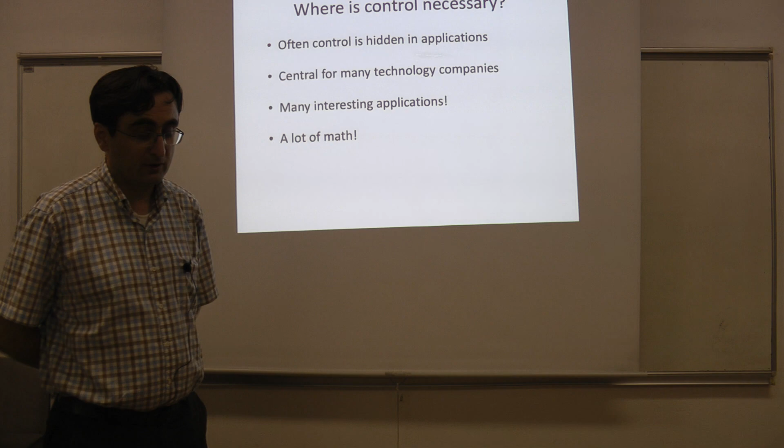Many technology companies try to apply control. We have many interesting applications, and one of the basic properties of control theory is that it's a very mathematical theory. You have to like mathematics in order to like control. It is more mathematics than physics, actually. In some electrical engineering courses, like electromagnetics, we have more physics than probably mathematics, in my opinion.

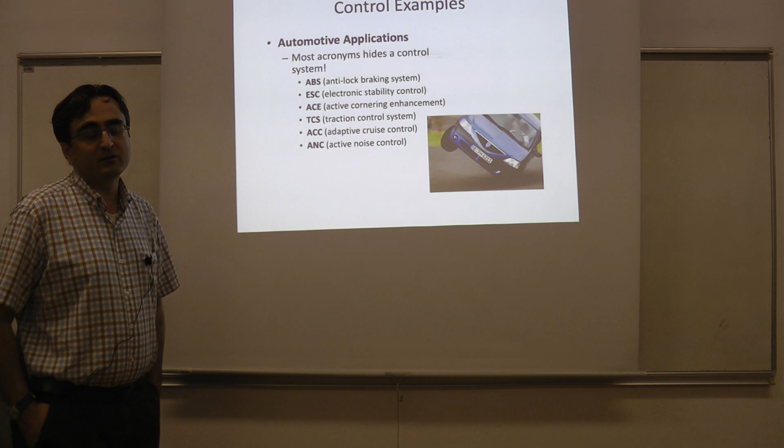But in this course, we are going to have much more mathematics than physics. So let us look at some control examples. In modern cars, you see lots of these abbreviations, and actually each one of them is a control example. ABS, anti-lock braking system, or electronic stability control - they are inherently control applications, and they are working while you drive your car.

The second example that I can give is industrial robots. These are doing the same motion over and over in a factory, taking something, and then taking it somewhere else to do some job. They have to do the same thing over and over, and for them to be successful, you need to control the electric motors placed in the joints of these industrial robots.

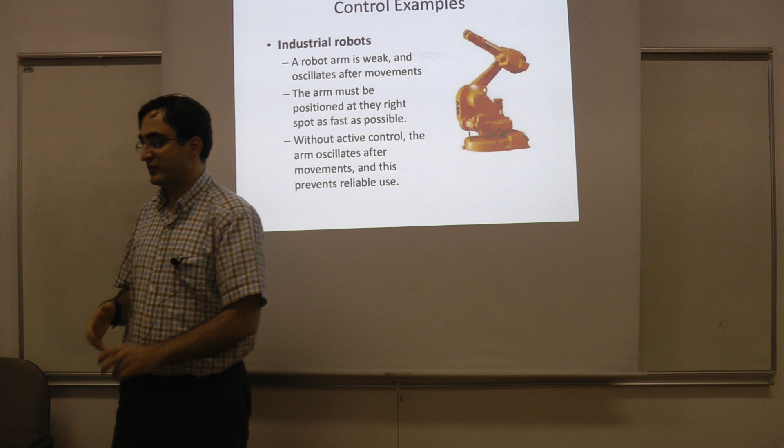One problem is that these robots are usually flexible. People want them lighter and lighter, so they don't want heavy robots, and when they become lighter, they become more and more flexible. That places a restriction on the properties of such robots - you have to control them in a very good way to avoid the oscillations caused by this additional flexibility. So this is also a classical control example.

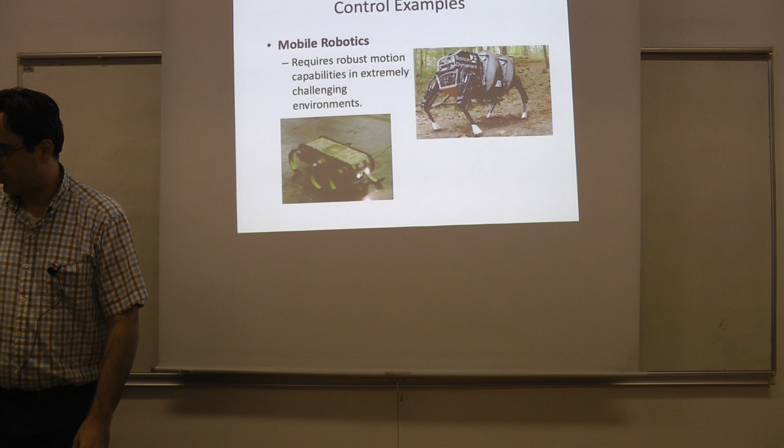The third one is mobile robotics. They're entering our lives more and more. You might have seen this Boston Dynamics robot - it's like, I don't know, maybe a donkey. We also have a robot in our department designed for very rough conditions, called a 6-leg robot. Of course, you have to control every electric motor put on these joints, and additionally put some more control into these robots for them to work safely.

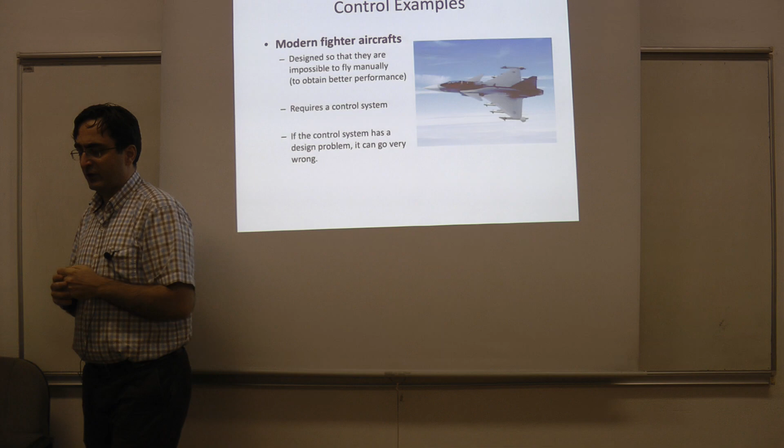Fighter aircrafts are another example. When you get in a commercial airplane, those airplanes are designed in a stable way. That means when the engines are shut off, the airplane would only glide - you won't immediately fall to the ground. So they have a stable structure. But fighter airplanes have to make lots of maneuvers quite fast, so their structures are usually designed in an unstable way. Without using control theory, it is impossible to fly these vehicles. If the control is not sufficient, these type of airplanes would fail.

I will give some examples from health. Diabetes - şeker hastalığı in Turkish - is when people's bodies cannot control the glucose levels in their blood. The organ that controls glucose level in the blood is called the pancreas, and if the pancreas goes out of order, you have the diabetes disease. What we can do is put a mechanical device into the body, such that glucose levels would be measured from the blood, and then we can inject insulin into the body intravenously. So this is a health application that uses a controller - by measuring the glucose level in the blood, it tries to control the glucose level in the blood.

We're going to see the connections between these applications.

Another example might be economical. At least I know you take multiple courses from the economy department. Here, one economical system we can talk of is the system between interest rates and inflation. As you increase the interest rate, the inflation would be decreased, and we have a relationship vice versa.

In control, we try to change or select the inputs of the system such that the output behaves in a desired way. How do we quantify that desired behavior? We usually model it with another signal called R of t, the reference signal. What we want from control is for Y of t, the output, to follow this reference signal R of t. The reference signal is the ideal thing we would like the output to do.

How does it do that? It does it, or we do it, by choosing the input in a satisfactory way. That is what control means. Here there are disturbances, and these are actually working against our control objective. Disturbances, as the name implies, are the inputs that we cannot control in the system, and most of the time they work against our control objectives.

So then what is control? Control is choosing the input U such that the output is close to the reference, against the disturbances. This is the abstract definition of control. The thing we would like to control is the system: input, output, and disturbances. The aim is to design the control input, to choose this so that the system's output behaves as wanted, becoming close to the reference signal despite the disturbances.

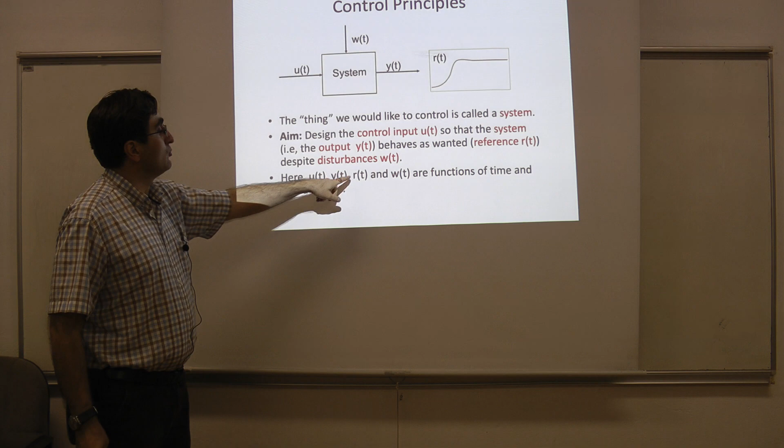We are going to see examples of this, as I've given already, and in those examples we will try to understand which signal corresponds to which variable here. So U of t, Y of t, R of t, and W of t are all functions of time, and they are called signals. We call a function of time a signal in this course.

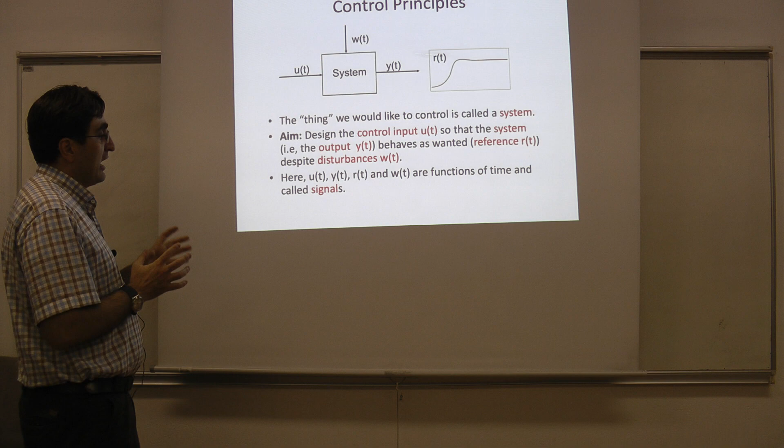Now let us look at some examples of such signals. I have four examples, and I will go over them one by one. The first example is the control of the speed of a car, car speed control, usually called in technical terms cruise control.

You might have heard of it if you look at some car advertisements. Cruise control is the control of the car's speed. We want the speed of the car to behave in a way that we like, and we are going to use the inputs in order to achieve that aim.

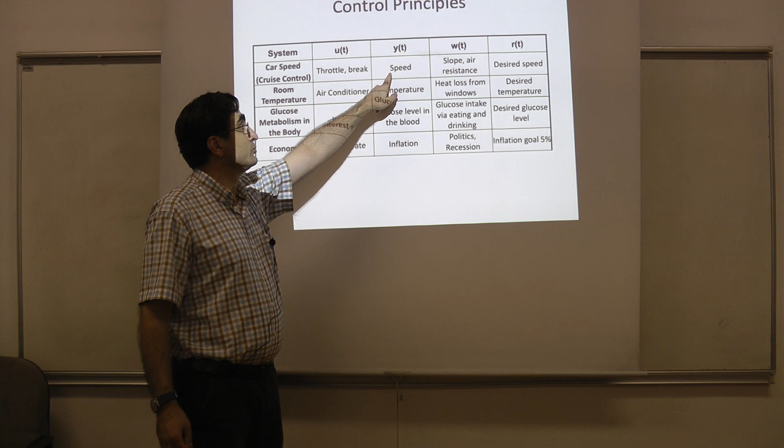Here our system is the car body, and the output of that system, the thing we would like to control, is the speed of the car. That is the output signal, Y of t. How do we control the speed of the car? There are automatic systems that achieve that, done by adjusting the throttle and the brakes.

Throttle is gaza basmak, the thing that increases the speed of the car. Brakes are fren, which decrease the speed of the car. In recent cars, there's always a circuit that tries to adjust the speed of the car if the user gives an order to do so.

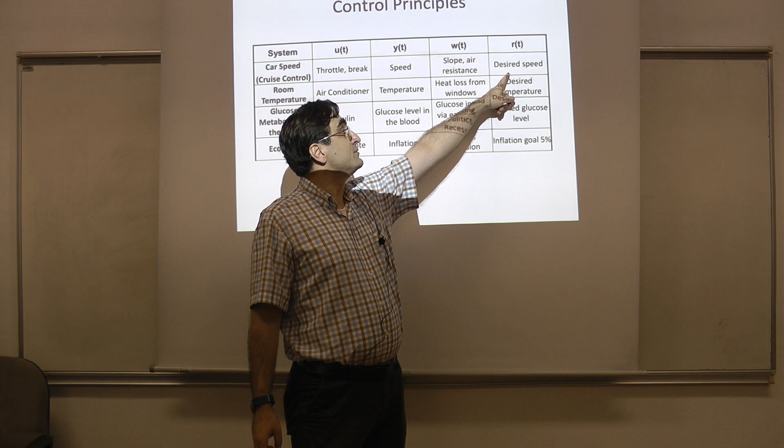For example, you can adjust a knob in your car so that the speed remains constant at 90 kilometers per hour. That is the cruise control objective: we want the speed of the car to equal the desired speed, 90 kilometers per hour. Our reference signal is therefore a constant at 90 kilometers per hour, and we want the speed of the car to be equal to that constant. To achieve this aim, we use the inputs throttle and brake.

So what can be some disturbance signals in that case? The car might be going on a slope so that it slows down if I don't do anything - that is one disturbance, the slope of the road the car is traveling on. Or the air resistance - as the car goes faster and faster, it encounters more air resistance. That is called drag, and it is also a disturbance working against our control objectives.

So this is our first example. The second example is the room temperature. Suppose that I'm trying to control the temperature of this room. Suppose it is at 23 degrees, a little bit cold, and I would like to bring it to a constant level, 27 degrees.

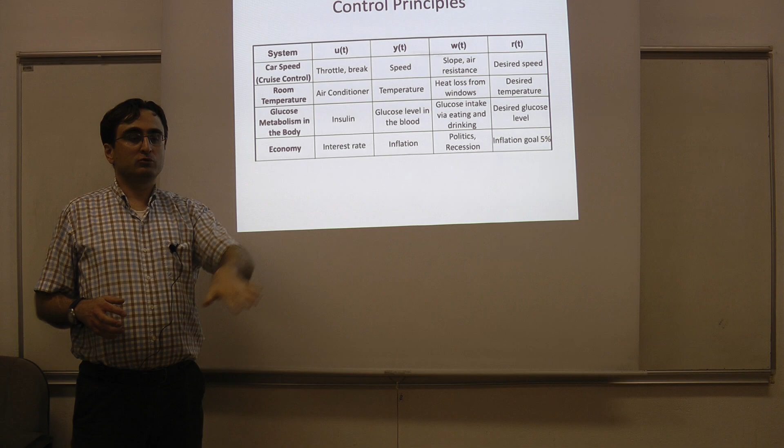In that case, what can be these variables? Our system is this room, or the air in this room, and the input we use to achieve this is the air conditioner - it can cool or heat the room to achieve our control aim. The output of the system is the temperature of the room, which we are trying to control. The reference is the desired temperature, again a constant. I do not want the temperature of the room to behave in an oscillatory way; I want it to be constant for comfort.

And what can be some disturbances? In this case, there is heat loss from the windows. If it is winter, it is going to be more difficult to heat this room. So the outside temperature, or heat loss from the windows, is a disturbance in our control system here.

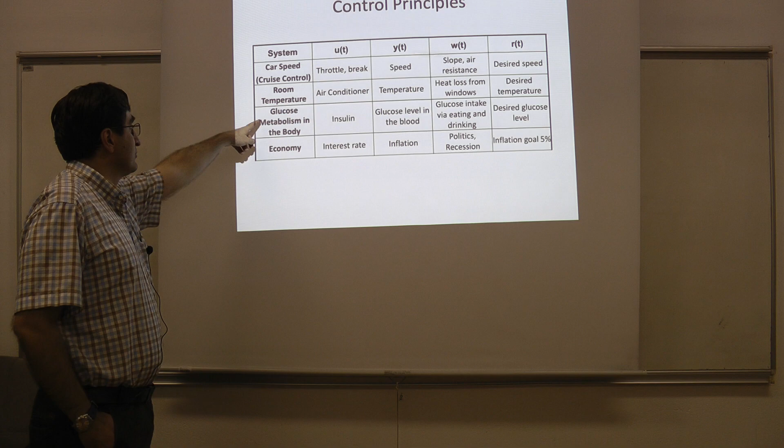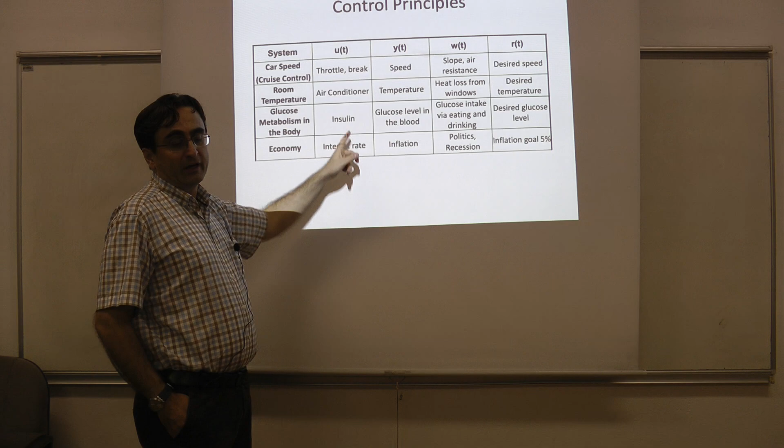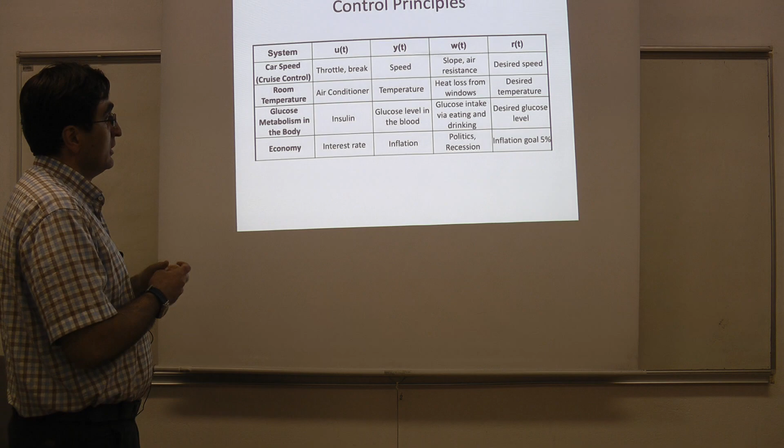I have already given these last two examples. It is the glucose metabolism in the body - the diabetes example. Here we are trying to control the glucose level in the blood; this is the output. Insulin is the hormone we give from outside because the pancreas is not working - insulin is our control input. We have a desired glucose level in a patient depending on their weight, so we have a constant reference signal: we want the glucose level equal to a constant.

What can be some disturbances here? During the day we are trying to keep the glucose level at a constant value, but the patient is going to eat and drink things that contain glucose, which increases the glucose level in the blood. That is against our control objectives - we are trying to control the glucose level despite the glucose intake of the patient.

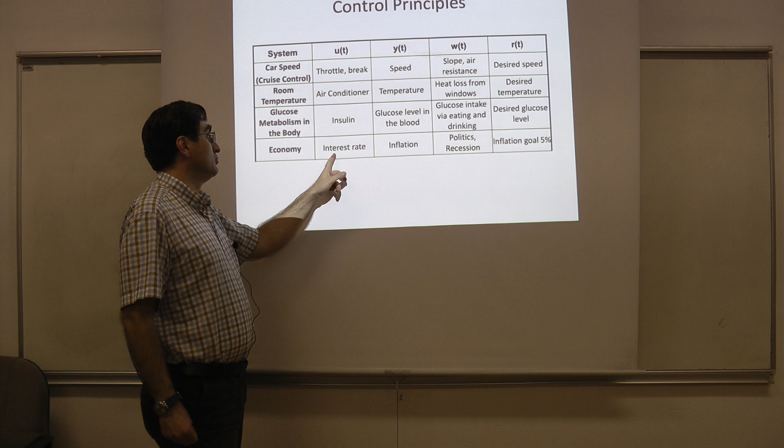The last example is the economy example. Here we are trying to control inflation in the country. Usually we have an inflation goal, which is 5% inflation per year, and the central bank uses the interest rate to control the inflation.

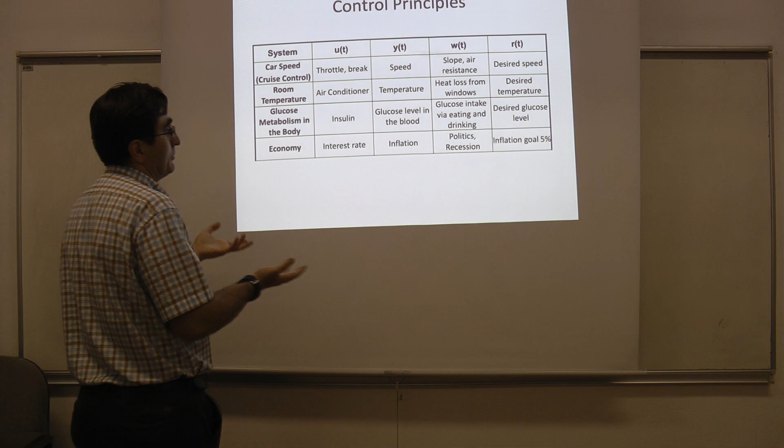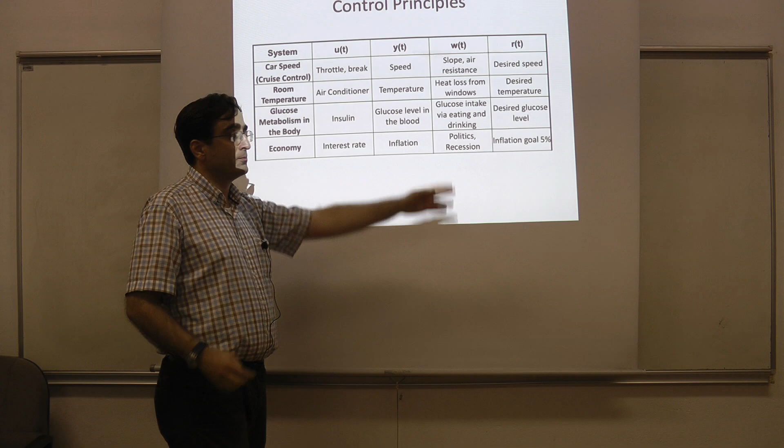What can be some disturbances in this case? The economy is a very complex system with lots of disturbances, but some obvious ones can be politics or elections in the country - these give a disturbance to the inflation. Or there might be a recession, which is a problem for the central bank and makes controlling inflation more difficult.

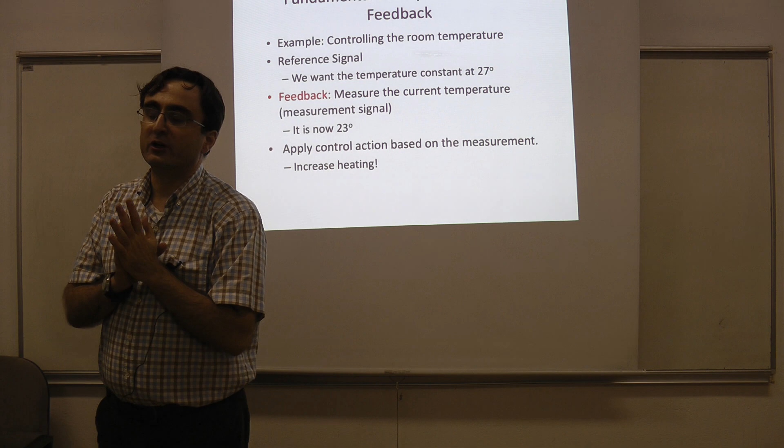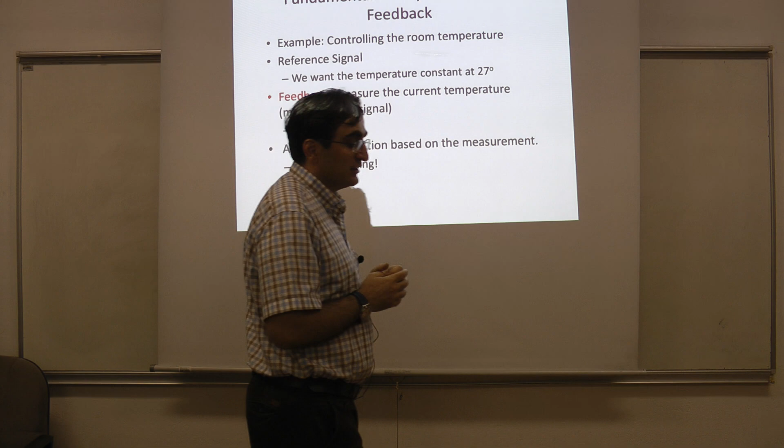So now let us go into the feedback idea. Let us go back to the control example, controlling the temperature of this room here. The room has a temperature. Suppose that I don't know that temperature, and suppose I want to bring the room to a constant temperature, 27 degrees. In order to achieve the control here, you have to measure the current temperature of the room. Without measuring the current temperature, you won't know whether to heat the room or cool the room.

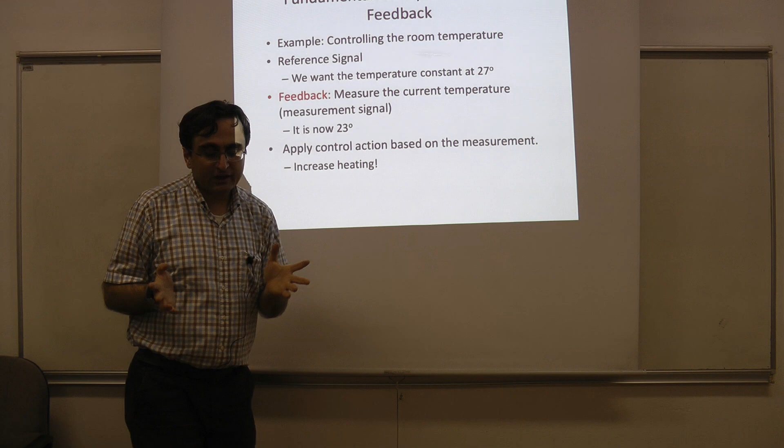So this measuring idea, measuring the current variable values in order to design the input, is called feedback. When you measure the current temperature, you know the desired temperature, and then you can compare those, and decide whether to heat or cool the room. That is the idea of feedback. Without feedback, you really cannot achieve good control most of the time. So measuring the current temperature is called the feedback.

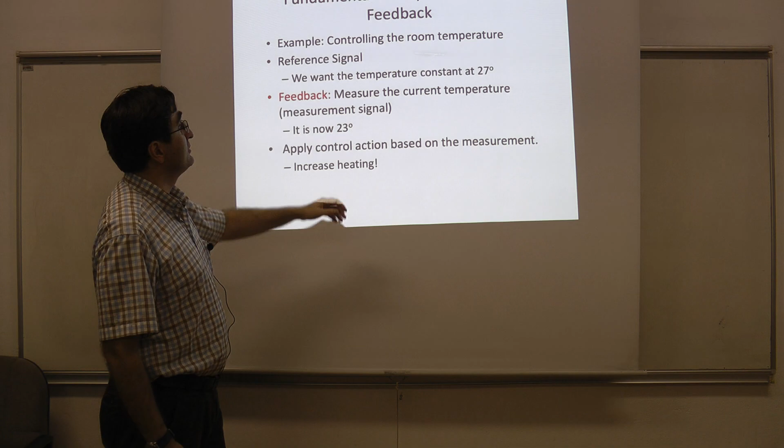Suppose that it is 23 degrees, then you know that you need to heat the room to reach the desired temperature here, which is 27 degrees.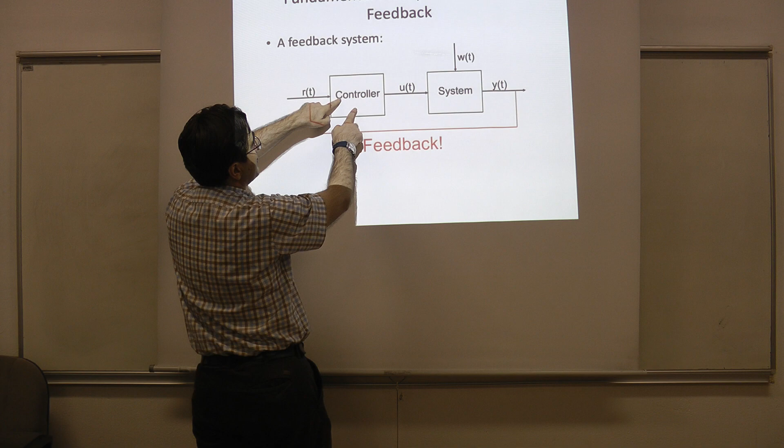What we do here is take the reference signal and the current output of the system, and put them into another system, and this system has the job of giving the input to the actual system. This additional system is called a controller.

Usually the controller is a human being. If I'm in control of an air conditioner in this room, then I know whether to heat or cool the room. In that case, I am the controller.

But if you would like to achieve this job automatically, then I have to put here an artificial system which is called just a controller, and this controller has to look at the reference signal and the current output value, and decide what input it should give to the actual system, whether to heat or cool the room automatically.

And this part of the system is called the feedback loop. This part is called the forward part, this part is called the feedback part, and overall I have a feedback loop. Without the feedback loop, this system is called an open loop system, the loop is not closed. With the feedback loop, we call this system a closed loop system, and we would like to investigate what the properties of such a system would be.

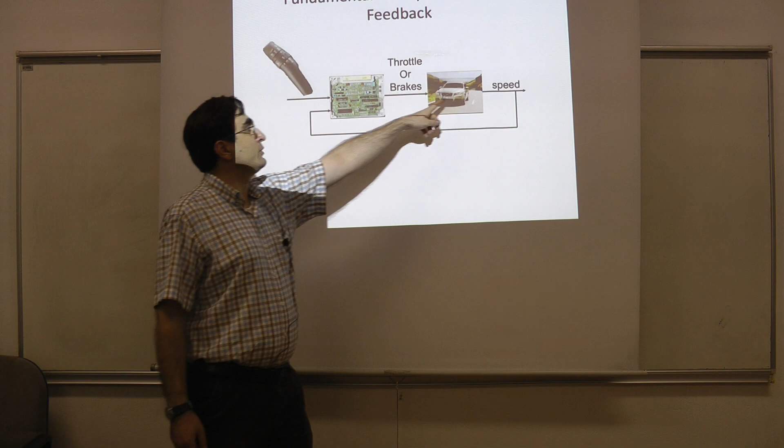He or she gives the reference speed here. If your car has a cruise control, you have a knob somewhere in the car that you can adjust the desired speed. This is the reference signal. There is a circuit in the car that can automatically apply throttle or brakes in order to achieve a desired speed. That circuit has to know both the desired speed, the reference signal, and the actual speed of the car, in order to decide whether to apply throttle or brakes. So that circuit is called the controller in this application.

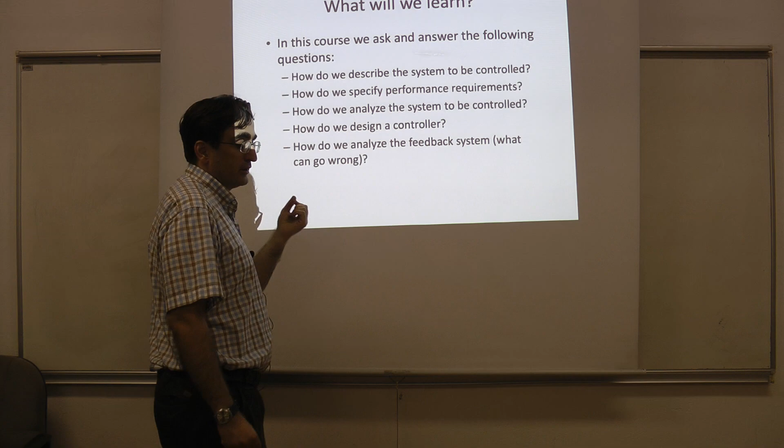The second thing we are going to do is define some performance measures for the control systems to satisfy. What can those performance measures be?

Let's go back to the cruise control example. Suppose currently the car I drive is going at 70 kilometers per hour, and I want the cruise control system to bring the speed of the car up to 90 kilometers per hour, because I want to go faster. Would you really be happy if the automatic cruise control system brought the speed of the car to the desired speed, 90 kilometers per hour, in 2 hours? You probably wouldn't like that. You want this to be fast, so you want the speed of the car to reach the desired speed in a few seconds, or half a minute or so.

Now suppose the same situation, but would you want the speed of the car to come to the desired speed, 90 kilometers per hour, in 0.1 milliseconds? If you think about the speed-acceleration relationship, if the velocity changes from 70 to 90 in a very, very short time, the driver and passengers are going to encounter strong acceleration forces. If you do this in such a fast manner, it's not going to be good either. So you really do not want the cruise controller to be too fast, because then the accelerations the passengers encounter will not be comfortable. And you don't want it to be too slow either.

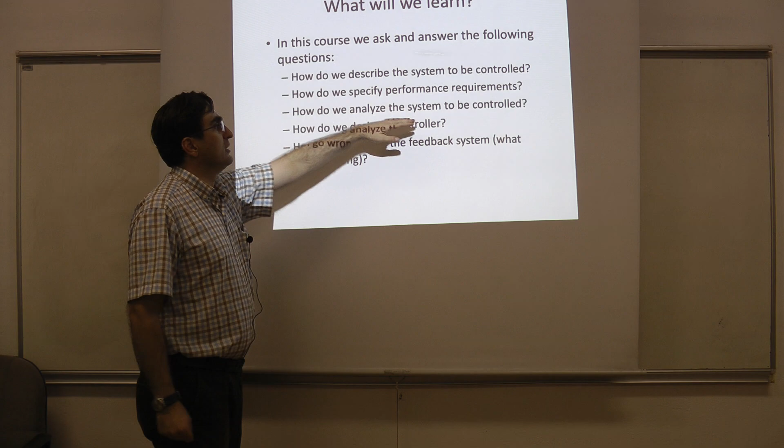And then we're going to see how do we analyze the system to be controlled. So we're going to see what is the open loop system, it is the car itself, and what is the closed loop system. What happens when I close the feedback loop? And then we're going to see how we design a controller.

So what type of system should I put instead of that controller block? We will see that there are some standard types, and we're going to see how to design those in order to satisfy the performance requirements. And finally, we are going to see how do we analyze the feedback system, the closed loop system, and what can go wrong. Sometimes a system with feedback can be much, much worse than the same system without feedback.

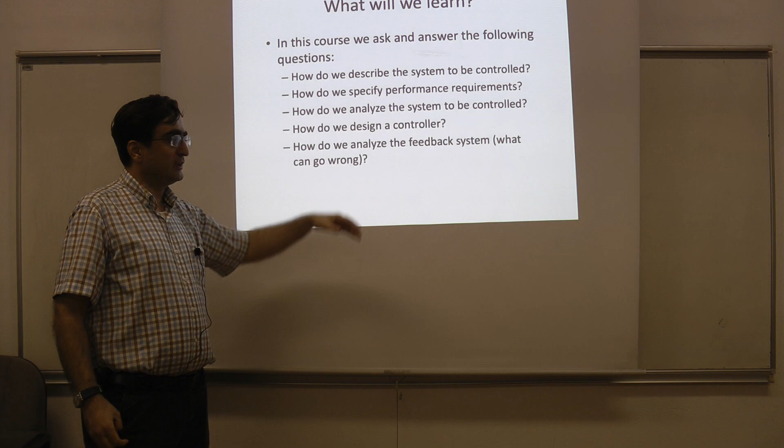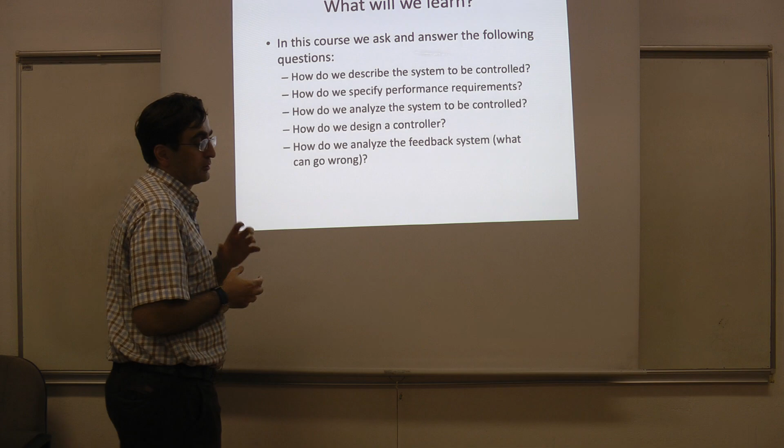We call this thing related to the performance of the feedback system the stability of the feedback system. So sometimes if you design your feedback system in a really bad way, then your system is going to be much, much worse than what you started with. We're going to see what the problem is, and this problem is going to be, again, something called positive feedback, and it is going to be related to the concept of stability.

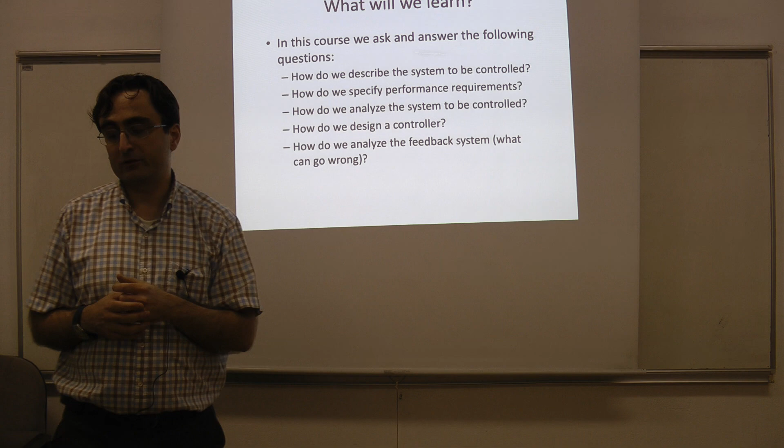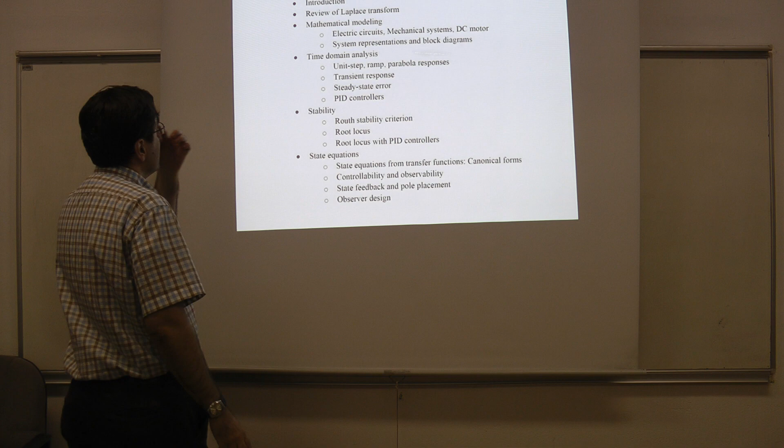So now let us look at the tentative course outline here. So we are here at the introduction. In this course, we are going to use some mathematical models, and these mathematical models are going to start with differential equations. Differential equations will be only the start.

We are going to see that handling differential equations by themselves is really difficult. So we're going to instead go into something called the Laplace domain. You have probably seen the Laplace transform in your differential equations course, but here, at the beginning of this course, I would first like to review this Laplace transform that we are going to use to transform differential equations into new types of models in the Laplace domain.

And then we are going to see the concept of mathematical modeling. In terms of systems, the mathematical modeling that we're going to apply is on electric circuits, mechanical systems, and something called the DC motor. Since you are not really electrical engineers, you have to think about these only in terms of mathematical models. You really do not have to understand every detail here, but you need to be patient.

Once we present the mathematical models here, they are not really going to be something difficult that you cannot apply yourself. So if you are patient in this part of the course, then I'm sure all of you are going to be able to write the mathematical models for such systems quite easily, and it's going to be useful in the other parts of the course.

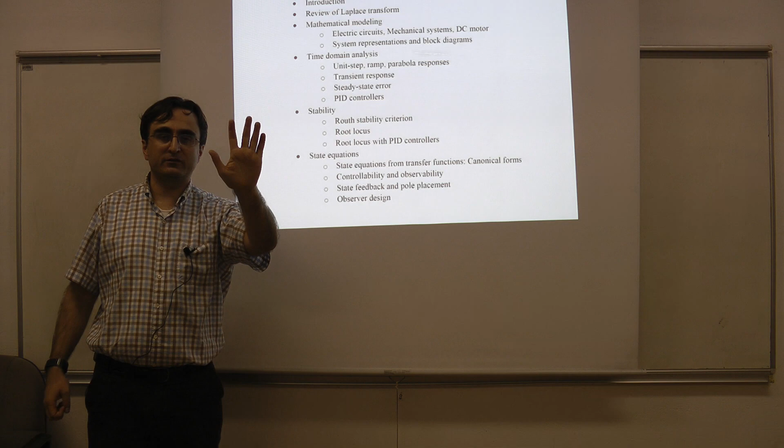So in total, we're going to see 3 different system representations. These are 3 different mathematical models that we can obtain for a single system. Of course, they are in some way related to each other, and we're going to see the relationship between those. Usually we're going to be working with block diagrams: connected systems, where the output of one system is connected to the input of another. We will also have some feedback loops in the block diagrams that we are going to use.

So this second part of the course is called time domain analysis. This is nothing but specifying the performance requirements of a control system. So in this part, we are going to learn how to specify the performance requirements from a control system.

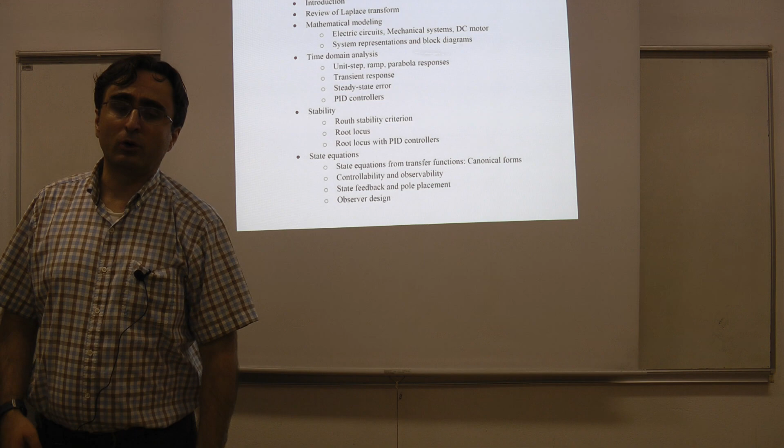And the third part is related to this important concept of stability. As I told you, sometimes feedback makes a system worse, and we are going to learn when it does that. So here, that is the concept of stability.

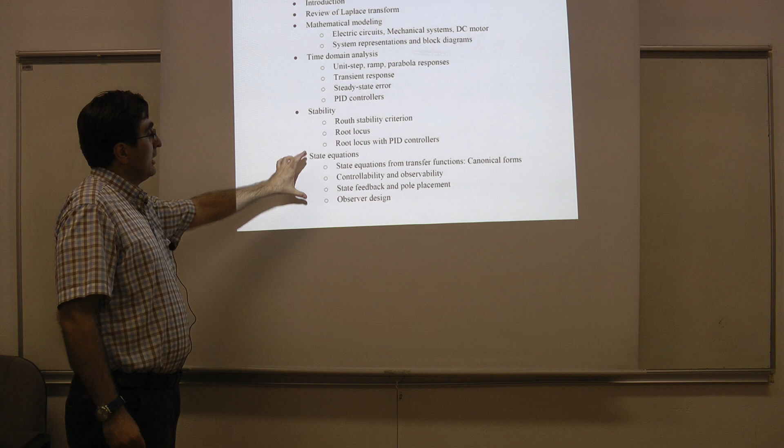And this last part of the course is the state equations. We're going to see one of these modeling types called state space representations, and we're going to apply the earlier ideas to the state equations or state space representations.

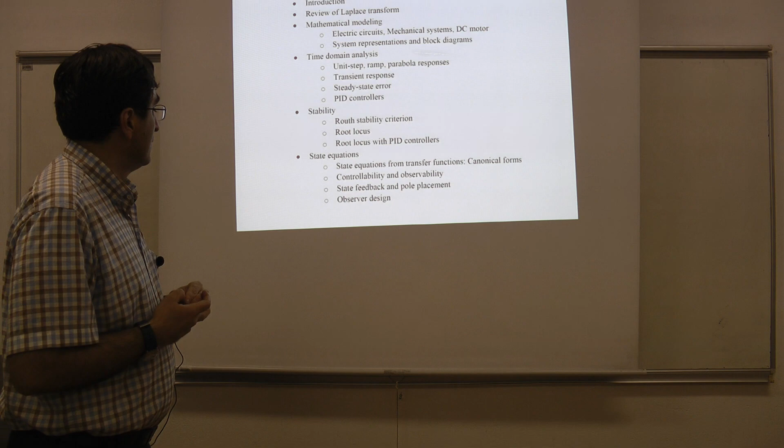So this is actually all that I can give about these slides. I would like to finish this lecture by working on a very, very simple example. For that, I'm going to turn off the projector here.

So let us start with something that resembles what we are going to do in this course. This is just introductory. I'm going to work on some pieces of information that we're going to give in the course. You really do not have to understand any of them, because we are going to be repeating these over and over when we go to the lectures in detail. But in this introductory lecture, I'm just going to go over some concepts that we are going to see in the course, and I will try to explain what each part means.

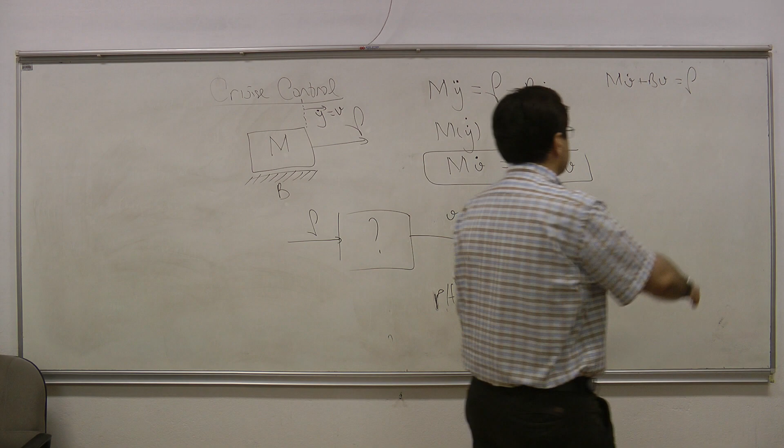In general, we don't want to use this differential equation model. Instead, we are going to be using something called a transfer function, and it's a Laplace domain mathematical model. We will usually show the transfer function of a system with g of s. It is a function of a complex variable, s. I'm not going to write here how I obtain this, but I will just write the result. You will know what such a thing would mean. This is going to be the mathematical model that we are going to be using to represent this cruise control system. This is called a transfer function mathematical model.

And if I show the cruise control system, let me erase this part a little bit. Then I'm going to have this g of s, 1 over ms plus b. I have my input, which is f here, and I have my output here, which is the speed that I would like to control.

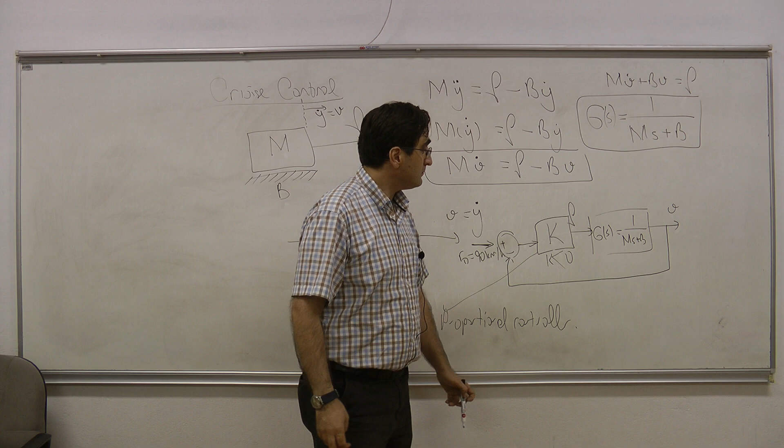Let's say the actual velocity is larger than 90 kilometers per hour. In that case, this difference is negative. With a negative controller gain K, a negative number times a negative gain gives a positive force. So the car was already faster than the desired speed, and my controller tells me to apply a positive force onto the car.

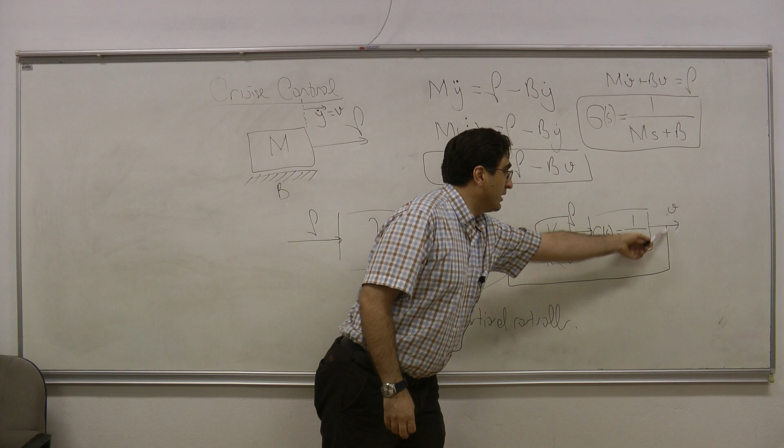The car is going to get even faster — we are getting further away from the desired speed. V was larger than 90 kilometers per hour, and it became even larger. This error became more negative, still a negative number, but its magnitude is now larger than before.

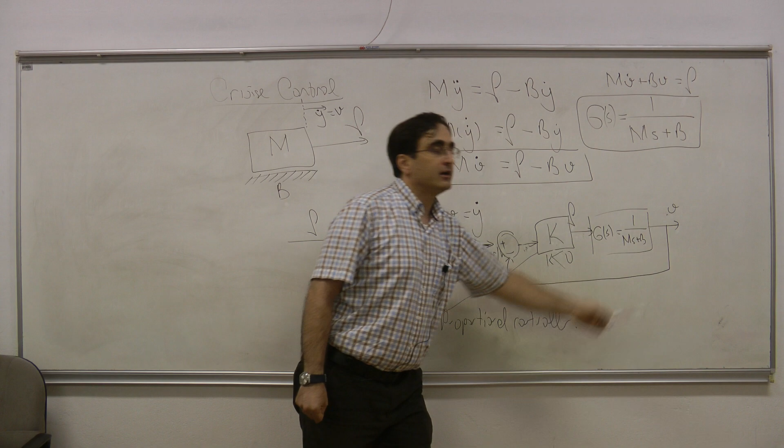This is multiplied by negative K, and I apply an even larger positive force to the car, making it even faster. This loop continues over and over, making the car faster and faster, getting away from the desired speed. This is called the instability problem in control, caused by the feedback. Without feedback, our car is fine, but with the wrong feedback loop, we cause some variables to increase indefinitely — that's a stability problem, and we'll see how to detect, analyze, and avoid such problems in this course.

So this was some introduction to the ideas of this course, and I hope I could give a glimpse of some of the concepts we're going to see. In the next lecture, we're going to start with the Laplace transformation — these S variables, how to obtain them, and why they are useful. This model is actually much more useful than the differential equation model, as you'll see in the next parts of this course. But that is going to be all for this lecture. Thank you for listening.